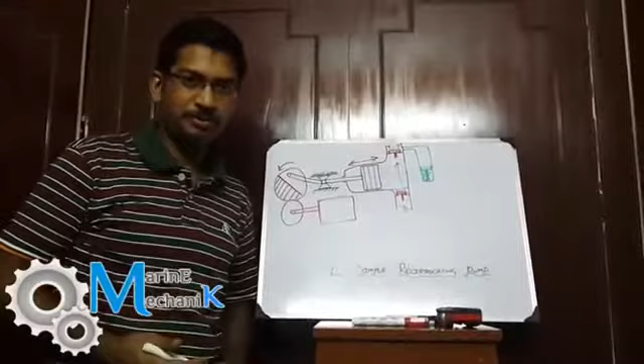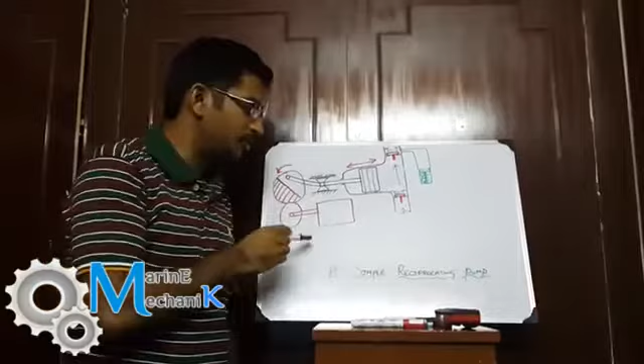Welcome you all once again to Marine Mechanik videos, and the topic for the day is a simple reciprocating pump. The reason why I've drawn the diagram over here is just to show you a simple examination sketch. There are much better diagrams available when you Google reciprocating pumps.

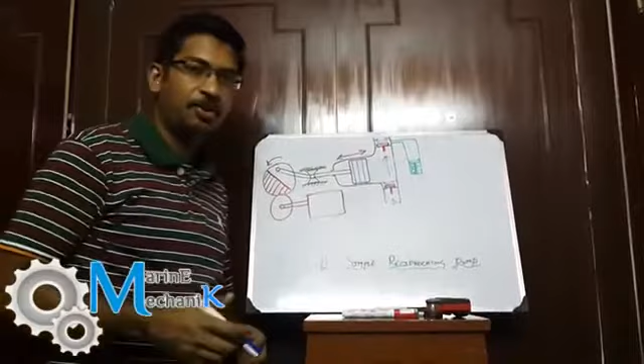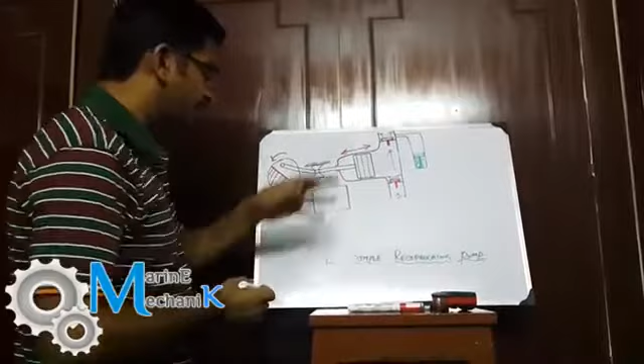So here is the simple examination sketch of a bilge type reciprocating pump. On board a ship especially you can find this kind of pump, and this is a cross-sectional view of it. So a simple description about it. This is nothing, just a gear wheel, so I'm just erasing it off for better clarity.

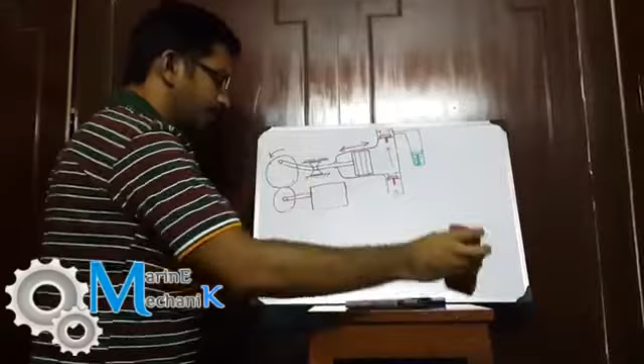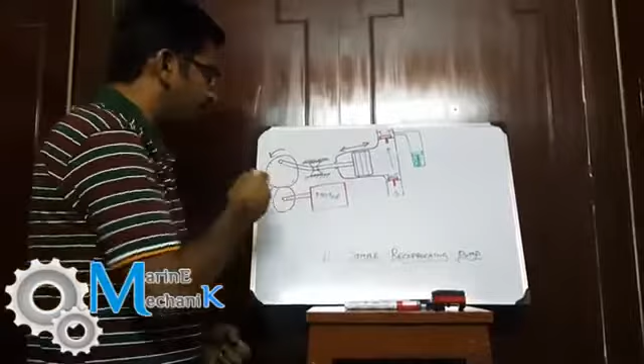Alright, so here is the prime mover, which is the electric motor, which has a pinion or a small gear, and then it's driving a bigger gear so that there is a speed reduction considerably. Sometimes they may be coupled to a pulley with belts. That's also possible. So this is one kind of mechanism which is having a gear drive.

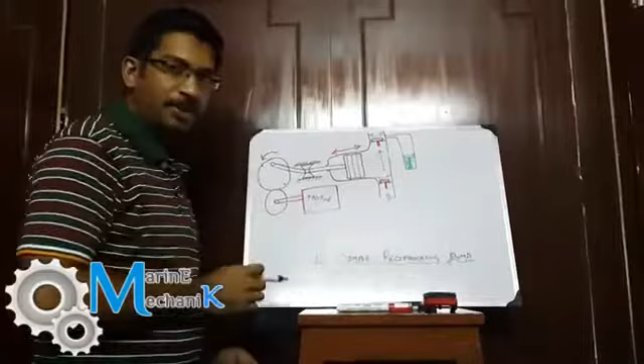And here is something like a crankshaft if you have one or two more units of piston. So in the cross section I have shown only one piston, but you might have a crankshaft if you have two or three more piston units. So here is the connecting rod, I'll write it as short as con rod. And here is the crosshead guide.

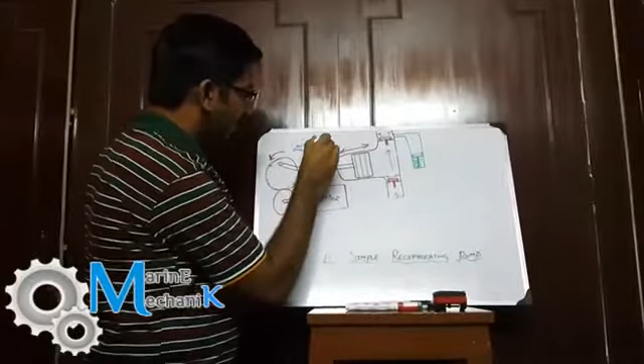Alright, so and here is the crosshead and the piston rod.

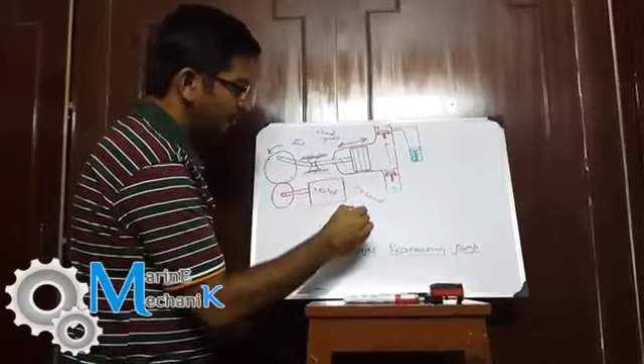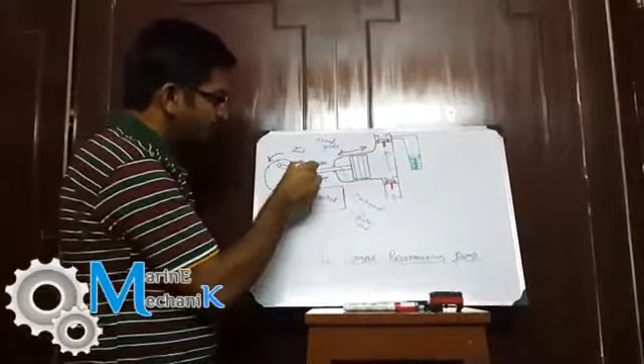Some pumps, this arrangement will have a cylinder lubricator attached to it, which will lubricate these two guides and the shoes, and sometimes the bearings on the crankshaft. That is also possible, and the normal lube oil what we use is the cylinder lube oil what we used to put it in.

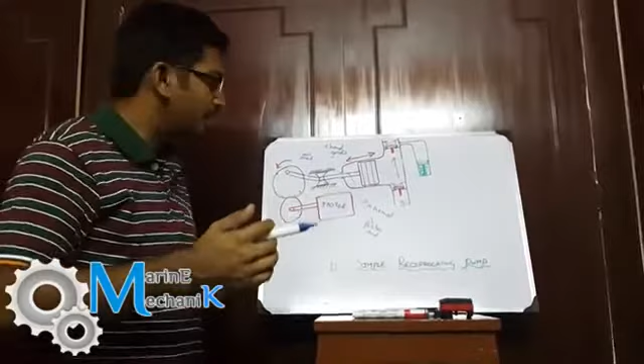And on the piston rod we have gland packing, which is usually 3 or 4 packings arranged in series, and then we have the piston which has 2 or 3 rings, and the piston ring material is ebonite usually, which is a soft rubber-like material, and it's easily replaceable. Once again I say the material is ebonite, and the piston moves to and fro inside this.

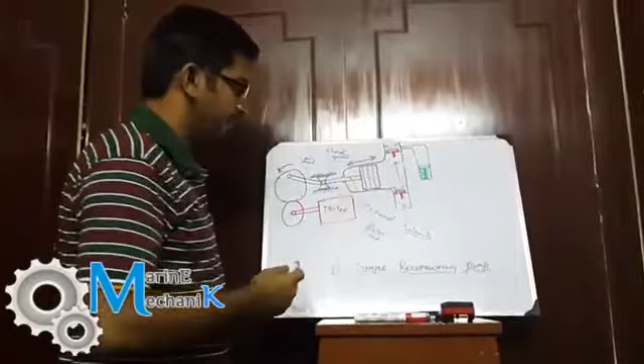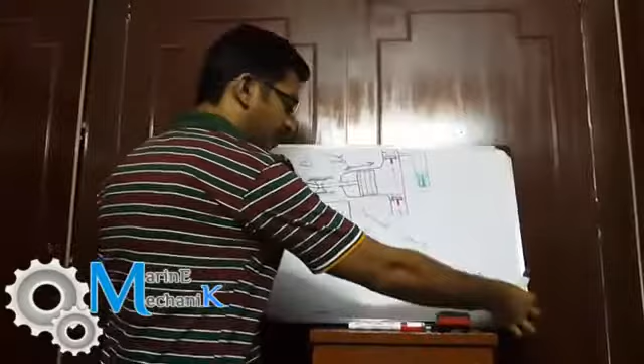And on board ships you can find this pump in this manner, where the piston moves top and bottom, something like this, or even sometimes like this. So it depends upon the manufacturer completely.

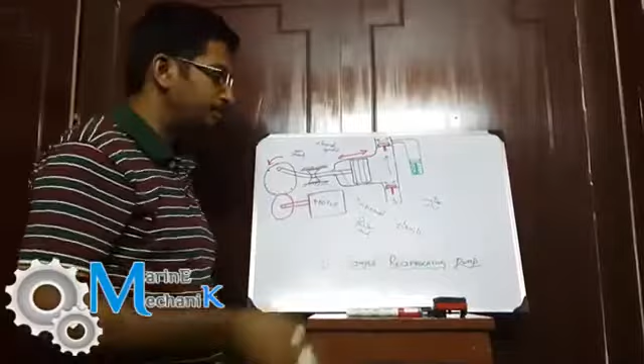So here is the suction valve and the suction piping, which has valve chest, maybe one valve from the bilge holding tank, one valve from the sea chest or the main seawater line, and other valve from the bilge wells. And here is the delivery or discharge valve.

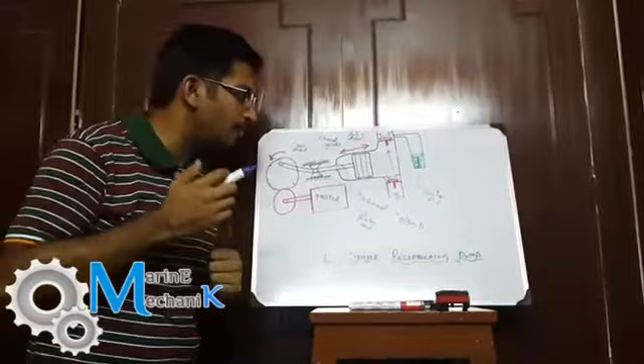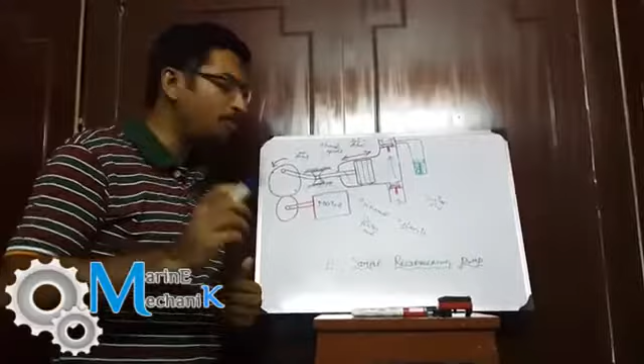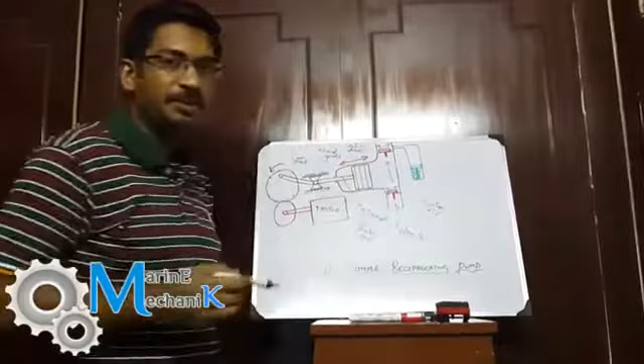And one main failing point what the examiners look for is the springs over here. None of the Google pictures will show this because I don't know, for some reason they are not showing this, but on board ship, on the valve chest, upon the suction valve and delivery valve, you will definitely have springs for positive closing of the valves. So this is one of the failing mistakes what the surveyor expects if he asks you to draw a reciprocating bilge pump in front of him.

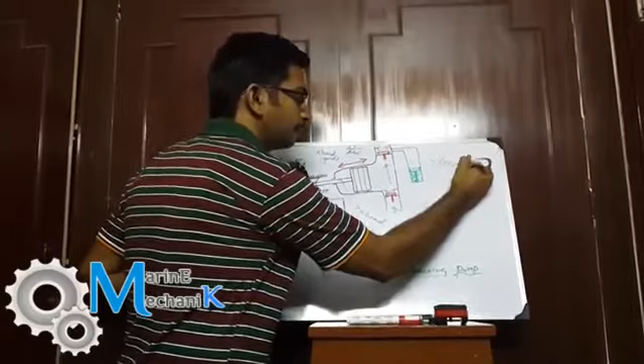And on the discharge side, I have drawn it upside down because the board size is not enough. So this is the accumulator or air vessel. Accumulator, or you can call it simply as air vessel.

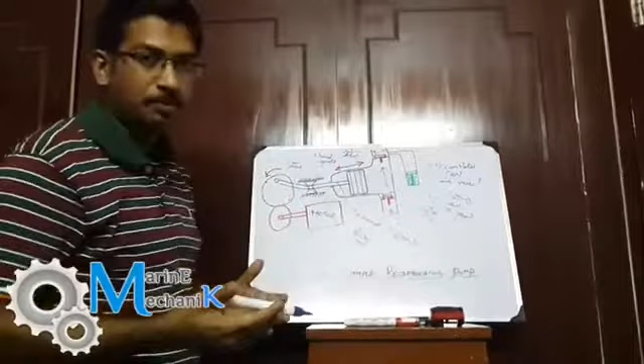There are 2 or 3 types which usually accumulator may be. One is spring loaded, and other is compressed air, and other is gas charged. So 2 or 3 types possible. What I have drawn over here is spring loaded, which has adjustable nut so that you can adjust the pulsations accordingly on the delivery line.

Now when the piston moves towards this way, let me call it as top dead center and bottom dead center, assuming this diagram in this position. So if the piston moves towards the top dead center, against the spring force the suction valve lifts so that the water comes in due to the vacuum. It is this vacuum which is created in this chamber enables the suction valve to lift against the spring force.

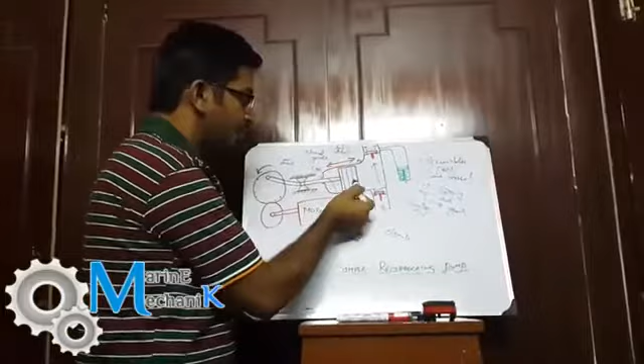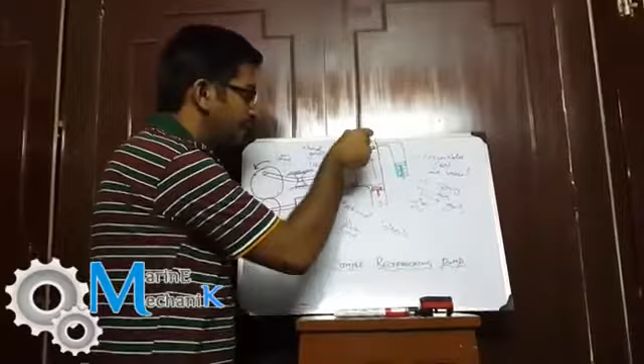During the suction stroke, when the piston moves towards the TDC, what happens to the delivery valve over here is the suction effect is also on it, and the spring keeps the delivery valve closed positively. So that's the purpose of the spring.

And during the piston travel from TDC to BDC towards this direction, the spring and the discharge pressure of the water closes the suction valve positively, and then it lifts the delivery valve over here against the spring pressure, and then it goes to the bilge holding tank or the oily water separator depending upon the pipeline.

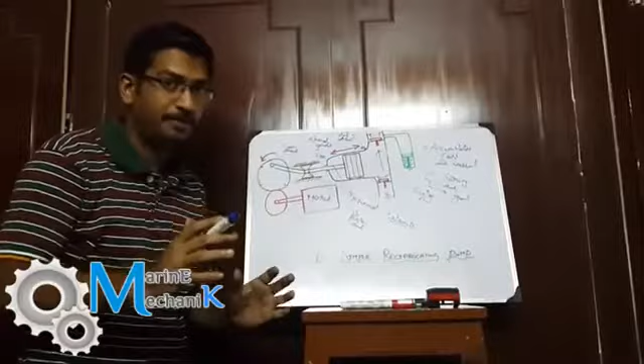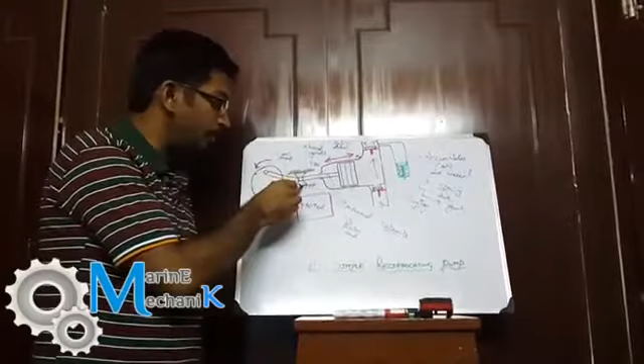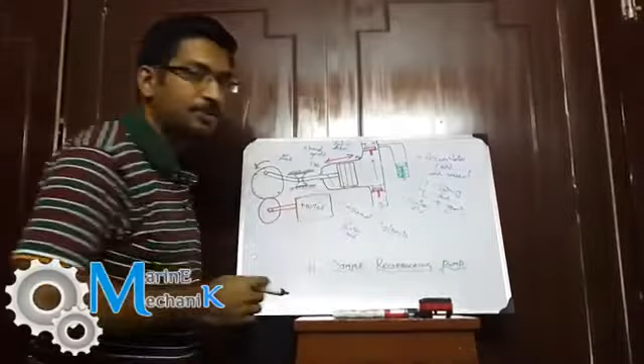The main operating problem you will encounter in this type of bilge pump is, if you don't lubricate it properly, it will get overheated, and you will not find out until the bearing completely wears out. Another possible reason is the piston rings getting broken or worn completely on the liner.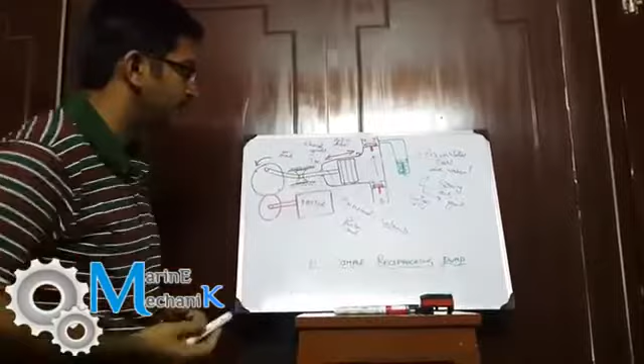And of course there will be some minimal leakage through the packings or gland packings on the piston rod. And if some debris gets stuck when the suction valve is open and it doesn't close completely, there's a great chance the bilge pump will not take suction.

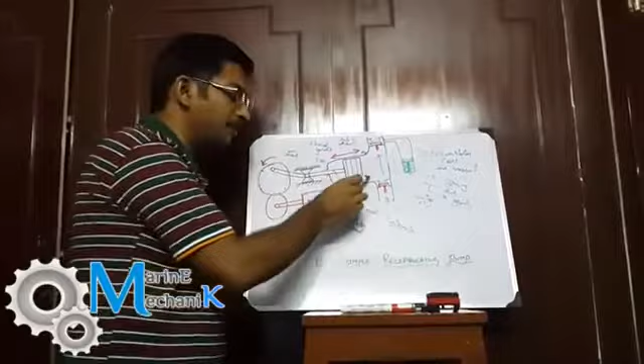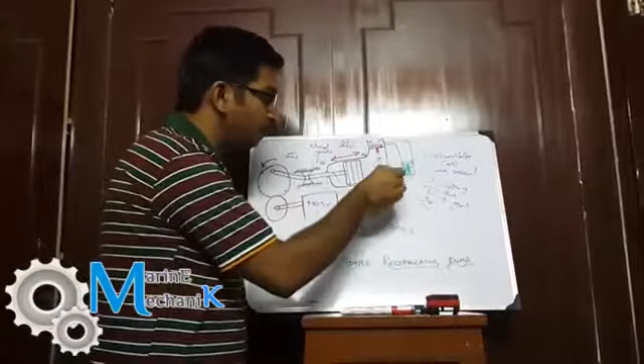So after cleaning the filters and suction strainers on each bilge valve, if the bilge pump still isn't taking suction, you have to remove the valve chest, take out the valve, clear the debris, put it back with the springs, and assemble it so the pump starts taking suction again. The same thing can happen to the delivery valve, which results in short cycling of the bilge water.

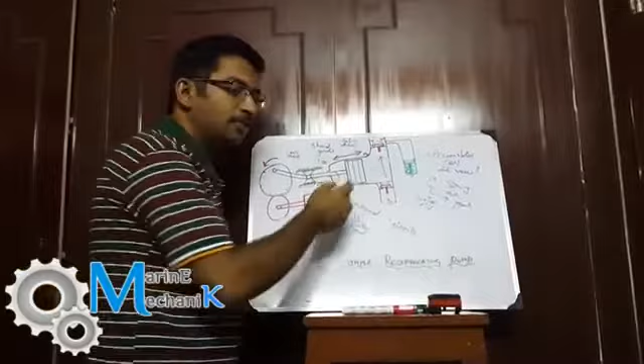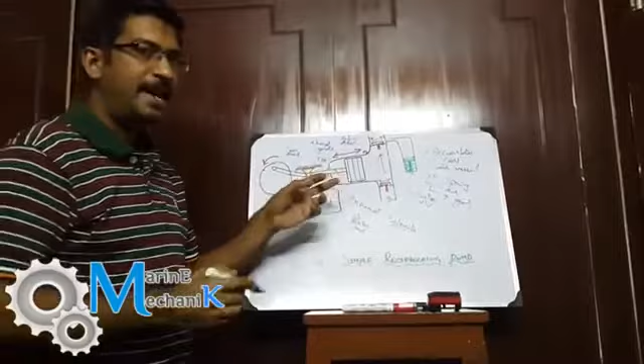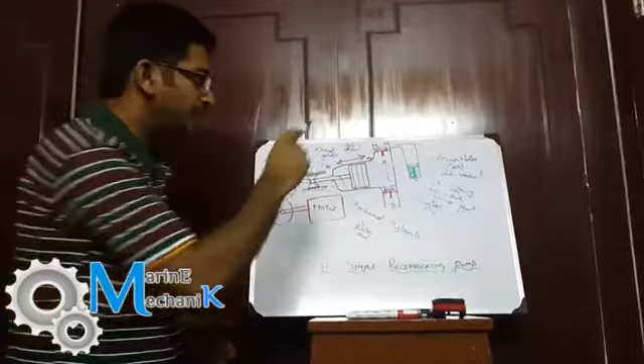The purpose of the accumulator or air vessel is to reduce pulsations. Say we have two piston units, and water is thrown out like two continuous jets depending on the speed of the motor. To reduce the pulsations, the air vessel is fitted so the water comes in, compresses a spring based on the discharge pressure, and as the discharge pressure drops, the spring exerts force so the water goes out. This gives a continuous flow of water without pulsations — that's the main purpose of the accumulator.

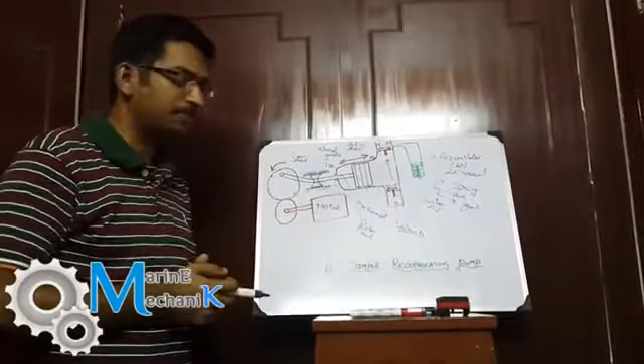So that's it about the simple reciprocating pump. I'll show a small animation taken from a website — I can't remember which one, and I didn't make the animation myself. Full credit goes to the website that designed it. Let's watch the animation now.

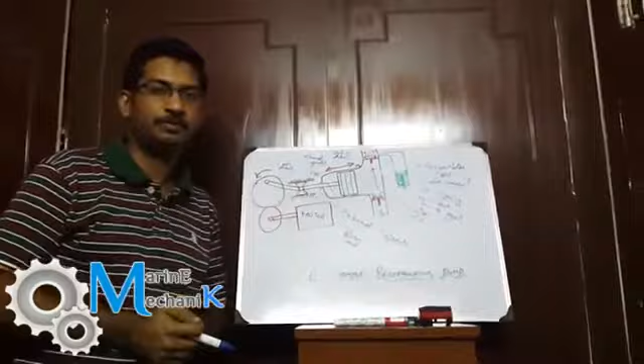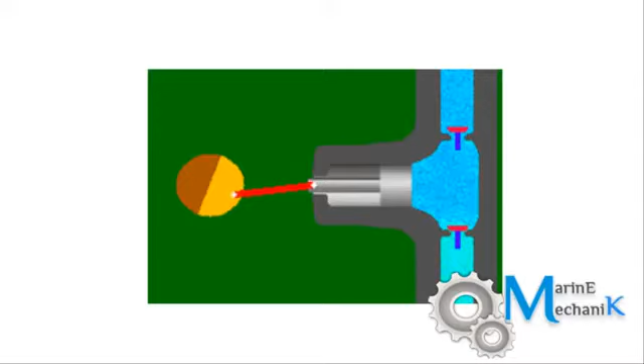As discussed earlier, here is a simple animation for the reciprocating type bilge pump. The suction valve and delivery valve lift based on the piston movement from TDC to BDC, and the piston rod is driven by the connecting rod, crosshead, and crankshaft via the electric motor, which drives through a gear or pulley mechanism. In this animation there's no spring shown on the delivery and suction valves as I explained earlier, and there's no air vessel provided either.

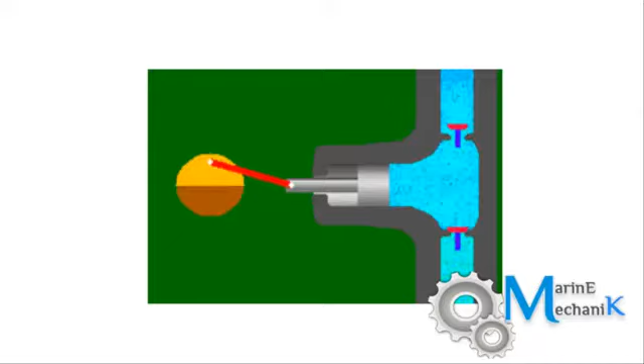So let's pass on to the next animation on the simple reciprocating bilge pump. That's the steam operated reciprocating bilge pump, which you can find on olden day steam ships.

Here is the steam chest, where the steam pilot valve controls the inlet and outlet of steam on top and bottom of the piston. This is a double acting steam piston, and here is the crosshead mechanism which drives the pilot valve, diverting steam on top and bottom alternately.

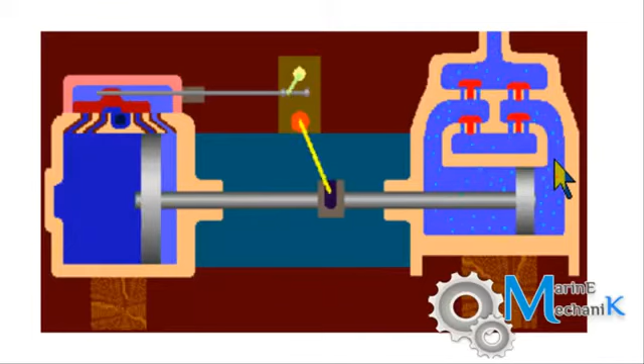Now looking at the valve chest, this arrow points to the suction valve chest. As the piston moves from BDC to TDC, one of the suction valves lifts, and water from the suction valve chest comes out and fills the chamber. Then as the piston moves from TDC to BDC, it lifts the discharge valve and the water goes to the discharge chamber.

Since there are two suction valves and two discharge valves with one piston connected to a common chamber, this gives more output or throughput than the normal type which has a single piston with a single suction and delivery valve. So this is a typical animation of a simple reciprocating pump of the steam operated type.